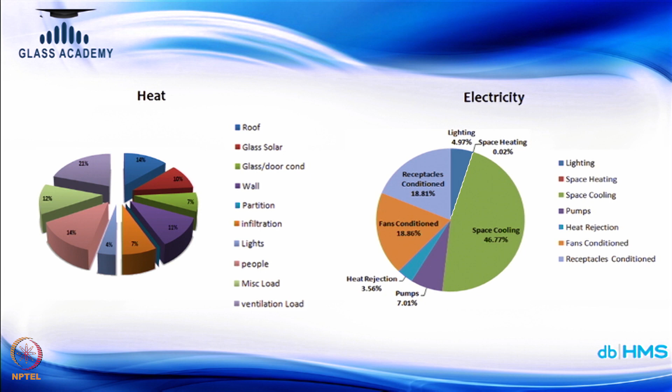Then we come to selecting various wall, roof and glass combinations. Today we have various options available, and most of the time this is determined by U value, K value, or for glass, the U value, SHGC value and VLT number. So what we generally do on actual practical projects is create a kind of comparative graph.

There are also various roof options: a regular RCC roof, RCC with a cavity, with 25 mm insulation, or with 50 mm insulation. How much is the differential heat contribution on a project? If we don't apply it on a particular project and purely compare two options, for example, an aerated concrete block is obviously a better insulating material than a regular brick wall.

If we take an example that an AAC block has a 3 times better value than a regular brick wall, even if the AAC block performs at 1/3, we cannot assume that the energy consumption is going to be 1/3. What we really need to do is apply it on a project.

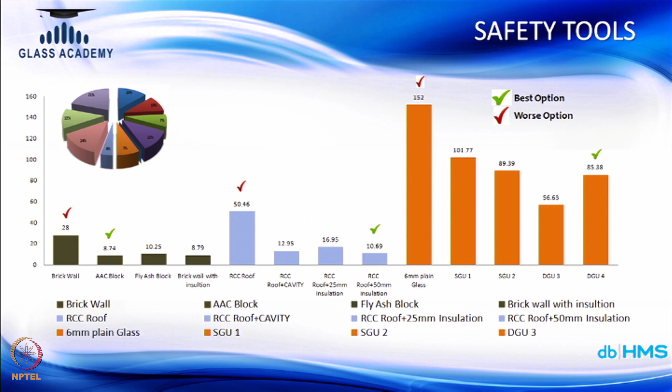So the point to note is that we should look at the overall contribution on a project and not conclude based only on a comparative technical or U value differential. So we looked at a slide where we were trying to compare wall, roof and glass separately.

Now once we have selected best and worst cases out of it, we can also combine all these things together and compare the overall impact on a project with different combinations of wall, roof and glass. For example, in one case we realized that a particular glass was better for a project, but cost-wise it was quite expensive. So we might choose not to go with the best choice of glass; however, we can go with the best choice of wall and roof, and together as a combined option that might be more attractive, which would be a good addition to the project.

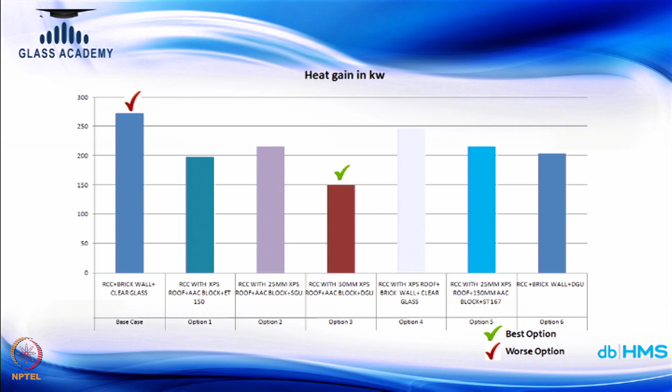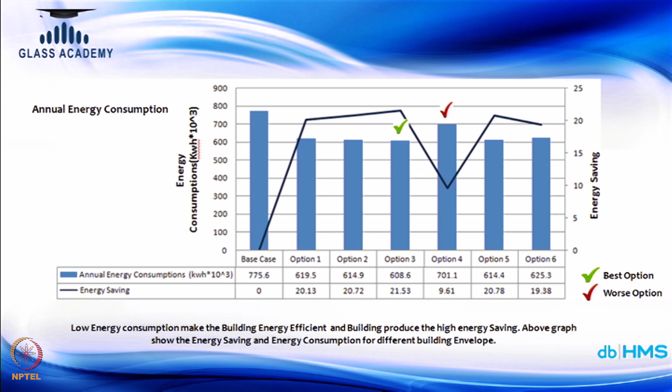Then we also need to link all this overall contribution to the energy consumption level as well. So in the same study, we can also see how many kilowatt hours of savings we can get on a project. So linking cost, U values and kilowatt hours becomes quite a good parameter to select on a building.

Generally in India, we always think courtyard buildings are ideally suited for the Indian climate. But we also need to understand that courtyard buildings also have larger surface area. So we cannot blindly decide that courtyard is the best suited option. We need to weigh the daylight impact, ventilation impact and heat contribution. So in many cases, courtyard might come out as a better option, but not necessarily in each and every project will it come out as the best option.

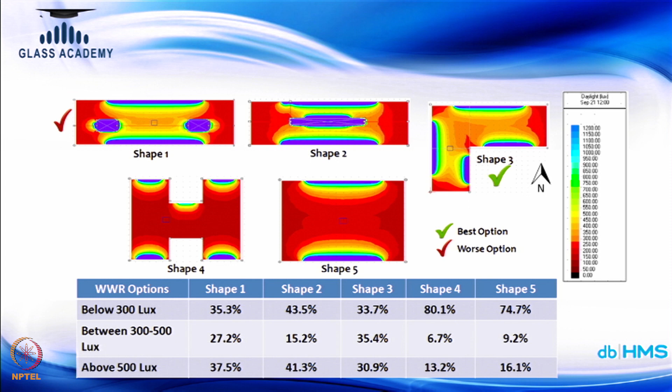So what you see on the screen is a study of daylight. Different shapes, and we have divided the overall daylighting distribution. So let's say it is an office building and the requirement of daylight is between 300 to 500 lux. So we have distributed how much percentage is below the required daylight levels, how much is above the required level, and how much is as per the required daylight levels. So this study very clearly says that shape number 3 has the maximum amount of area which is under required daylight levels. So that might be a better option to go. So how much surface area we have has a direct relationship with how much heat is going to come inside from the envelope.

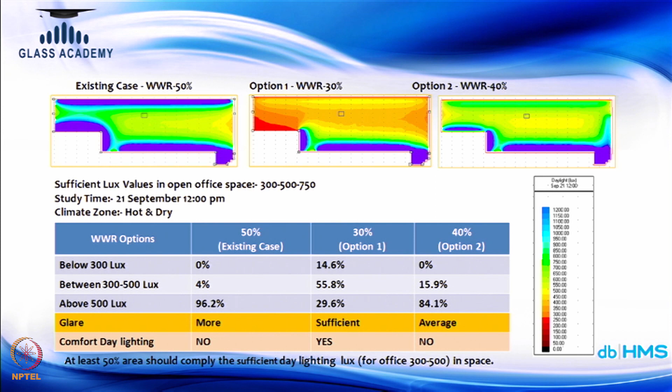Then if we cannot change the orientation, if we cannot change the building shape, if we cannot change the window to wall ratio, then we come to a last resort where we have only one alternative to change the performance, which is the kind of glass. So today we have various glasses which have different U values, different SHGCs, different VLT values. So we have a wide spectrum of glass properties available to select from.

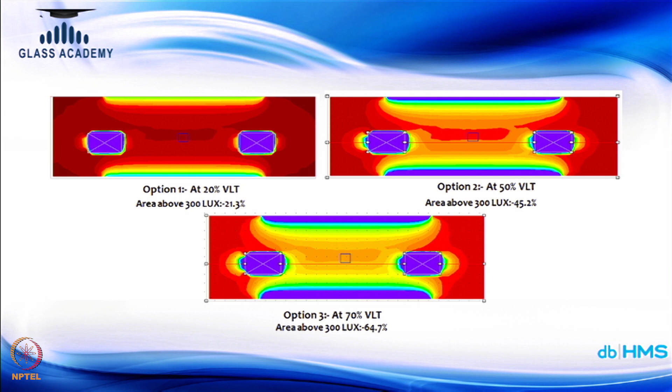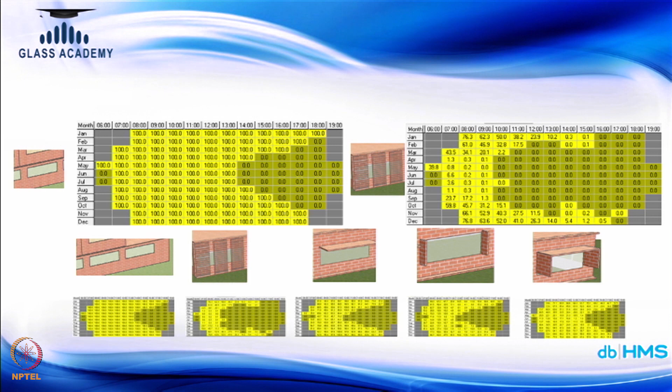So this is just one of the options, but as you see below, there can be various other options that we have, different shading devices which we can play with. This is dependent on the direction of a window as well. This study is for a particular direction, but we can carry out a similar kind of study for all directions, north, south, east, west, or if a building is also exposed at a 45 degree angle, we can do this kind of study for all kinds of angles as well.

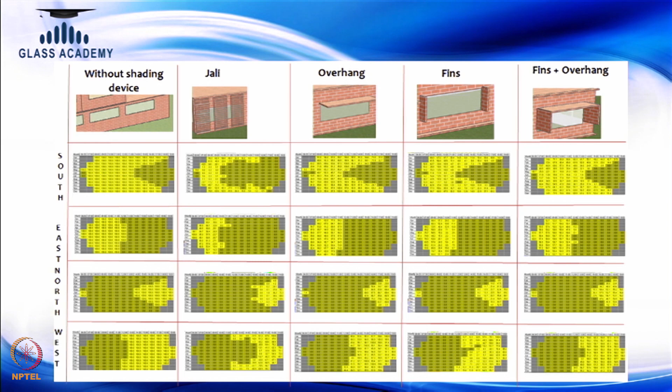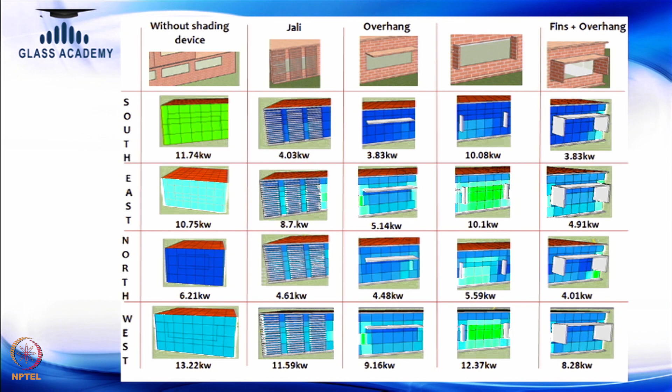So this is telling us how much is the overall solar radiation falling on a particular window. The same study can also be taken ahead, and we can also check how much is the kilowatt heat contribution because of a change in the shading device. So what you see on screen is how much is the overall kilowatt heat contribution happening because of different options. If we do such studies, there are various kinds of shading devices which can become a solution. For example, what you see on screen, one is a modern solution, one is an old way of solving the same problem.

But the important aspect is, if we have well shaded windows, we need to factor that in when we select a kind of glass or a kind of envelope. Lastly, overall we can predict. What you see on screen is solar radiation falling on a building. Red color is maximum intensity and blue color is least intensity. What you very clearly see is most of the roof areas have maximum intensity, but most of the facades, which are wall and glass, have a blue shade.

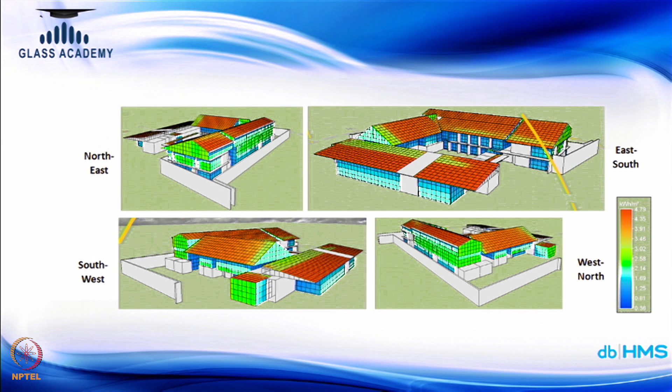That means whatever studies are done, when finally a solution is arrived at, we have facades which are naturally well shaded. So when we reach this point, we are very sure that we have a well designed building, and only after this point we can start looking at technical aspects of wall, roof and glass. Only after solving all these things is the right point where we start looking at what are the U values, what are the resistance values, what are VLT values for glass, roof as well as walls.

Another case study. The earlier case study that we talked about is when we start early on in a project and we have flexibility to select orientations, window to wall ratios, shadings, as well as different qualities of wall and glass. Many times we can also be on a project which is quite advanced and we have a limited area to improvise on. There we might be looking more at selecting the right U values and more technical aspects of it.

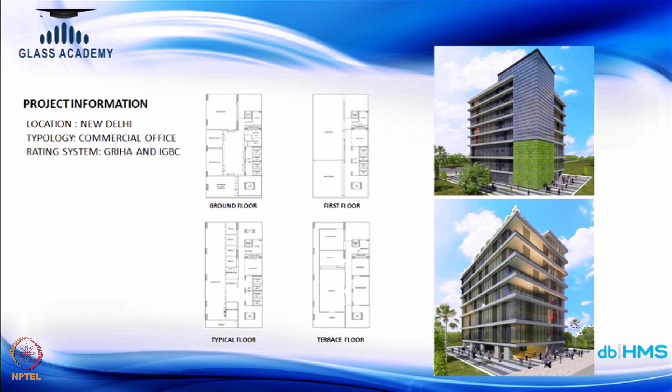So this is a case study. It's a kind of corporate office. The project is in Delhi, and this is the overall view that we have. There are different floor plans that we have. Earlier when we started looking at this particular building, there was a facade that we had in front. This building was also going for IGBC as well as GRIHA rating.

IGBC as well as GRIHA, both of them give a prescribed U value for wall and roof, and SHGC, U value and VLT ratios for the glass that we select. So when we started looking at it, the project was trying to go ahead with a particular glass which was qualifying under one rating, but it was not qualifying under a different rating.

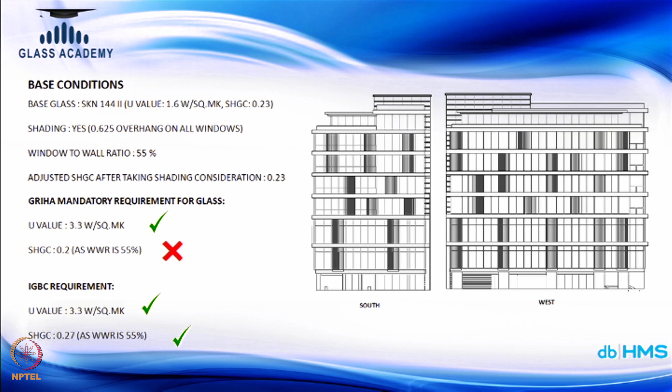The U value was qualifying overall, and the SHGC was a slightly challenging scenario. So after going through various studies, what we realized is there are three ways to tackle this scenario. Option one was we reduce the overall window to wall ratio, because the less the glass, the less is going to be the contribution. So if we have less glass, then we can have slightly more clear glass, or we have more leeway on the SHGC value that we can select.

One of the options was to add some more shading devices on the facade, and this is also specific to the direction of the glazing as well. So we suggested various different percentages of shading devices spread across various facades. That was one option which was possible. Another option which was possible is to change the overhang length. So we tried out various depths of overhangs.

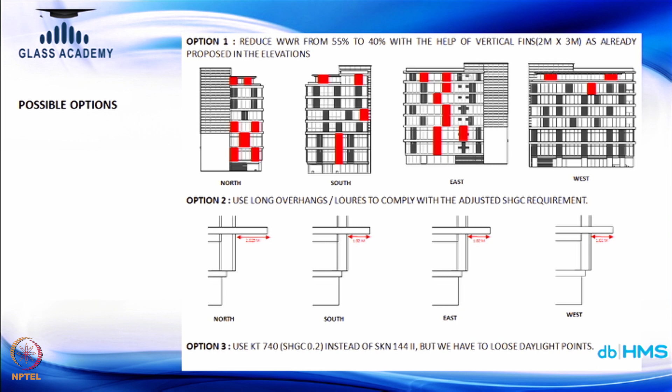And the third option which was possible was purely changing the kind of glass. But if we don't do option 1 or 2, then the option that we were left with is having a particular glass which was quite darker in nature. So it was not giving a good look to the building, as well as from inside it was not giving nice views outside. So on this particular project we went ahead with the first option and then improvised different kinds of glass properties on different levels of the building as well.

So overall, we reduced the overall window to wall ratio. We changed the overall VLT values to achieve maximum daylight. We achieved an overall heat reduction of almost 12%. The overall energy impact of that was almost around 35 to 43%. Aesthetically, we managed to keep it a good looking building as well and not make it too dark. So there are various good aspects which really came out of this study.

The next study I'm going to talk about is another project. This is in Gurgaon, so it's a large, again corporate office building. The overall architect's vision was it should look lighter in nature. So the first instinct was to go with an all glass kind of building, but that was not a good choice, as we all know that it really has a direct impact on air conditioning load as well as energy consumption. So what was really done is the overall facade, though it looks more like glass, is divided into different types of glasses.

So on some parts where it's directly between sill and lintel level, we have clear glass, but at sill level and above lintel level, generally we have false ceiling. So all the area in front of that, though it will look like glass from outside, is opaque from inside. Same is true at sill level as well. So using that, we reduced the overall window to wall ratio on the project.

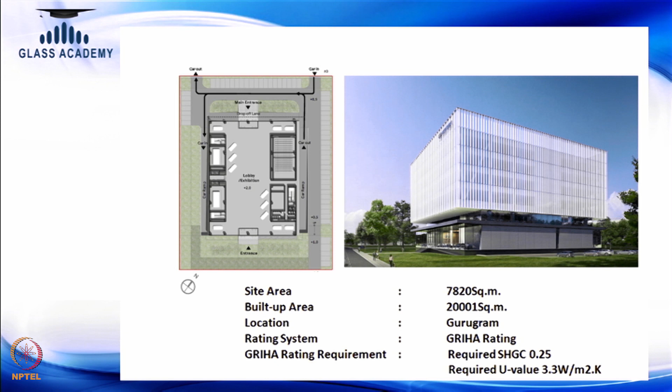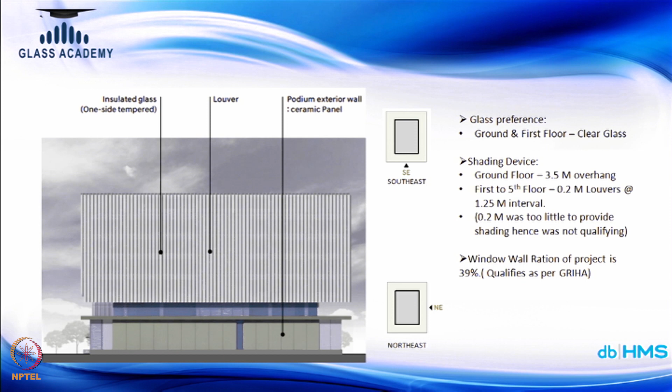Another aspect that we introduced is louvers. So there are louvers all around, on all directions. The depth of louvers varies based on which direction we are in. So we also worked out various options for the overall depth of each and every louver. Another aspect that we also looked into is having different kinds of glass based on what kind of function is there on each floor.

For example, the lowermost floor was more of a showroom kind of activity. So they wanted more clear glass so that people from outside can very easily see inside. So on the lowermost floor, we have gone with a more clear glass, while on the floor above, where we don't need that much clarity, we have gone with an efficient SHGC value. So we have more of a reflective glass.

So with a weighted average methodology, we can also change the kind of glass on different sides to really achieve the overall saving. So though the overall building still looks more like glass, the overall window to wall ratio, shading, and high performance glass have all been taken care of. So in this particular project, we are achieving almost 24% energy savings compared to the baseline given in IGBC as well as GRIHA. Thank you.